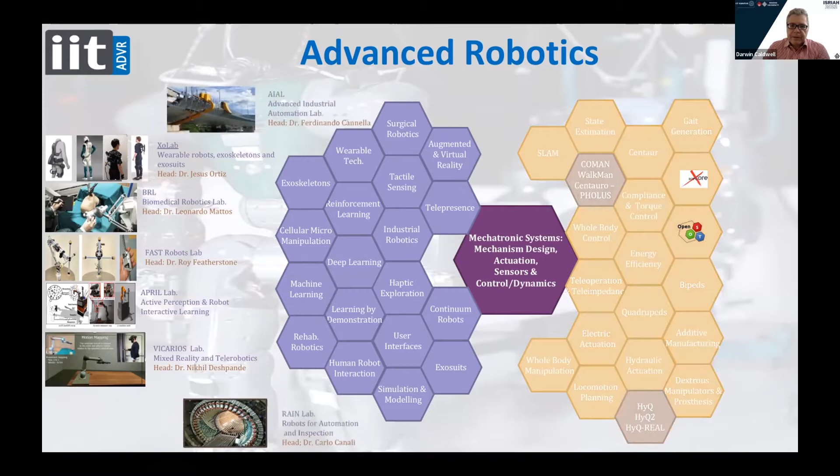To give a bit of history, IIT was created in 2006, after the ICUB, which was built in a project prior to the IIT's setup. The first robot we built was the C-CUB, which was compliant. Traditionally, humanoids and humanoid-type robots have always been very rigid. In fact, all industrial robots are very rigid—they're not designed for interaction with humans.

And so the C-CUB was designed as a compliant robot you could physically and easily interact with. It was designed to have the ability to go between being soft and being very stiff, so you could modulate the stiffness of the actuators in a way reminiscent of humans. We then focused that into a robot called Coman, a very small humanoid about 1.20 meters tall—it doesn't have a head, but it's 1.20 meters tall. This was built in 2012.

Then we developed that into the Walkman robot, with two versions: a 2015 version and a 2018 version. This was a very large robot, 1.80 to 1.90 meters tall. The first version weighed 120 kilos and competed in the DARPA challenge. The second, 2018 version weighed about 90 kilos—same power as the original but a much lighter structure.

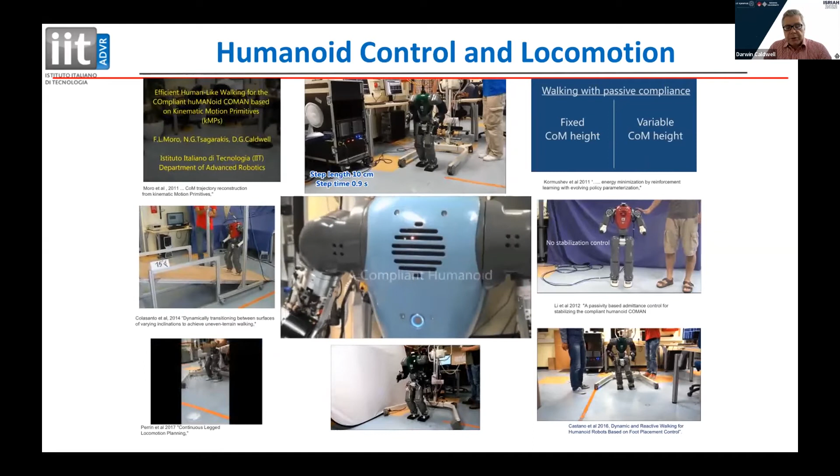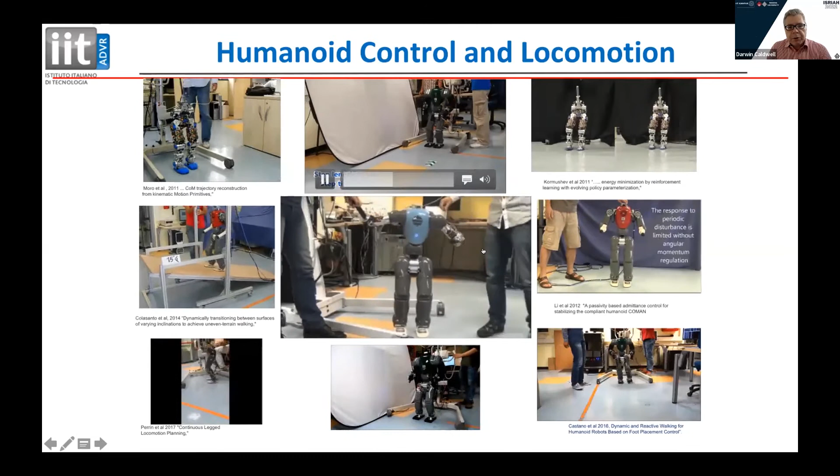This is just to show you a bit of this work, some going back 10, 11, 12 years. Here at top left is the C-CUB, and most of the other robots here are versions of the Coman robot. In the middle you can see how easy it is to physically interact with it—you wouldn't do this with a normal industrial robot—and you can see how the compliance can actually be regulated.

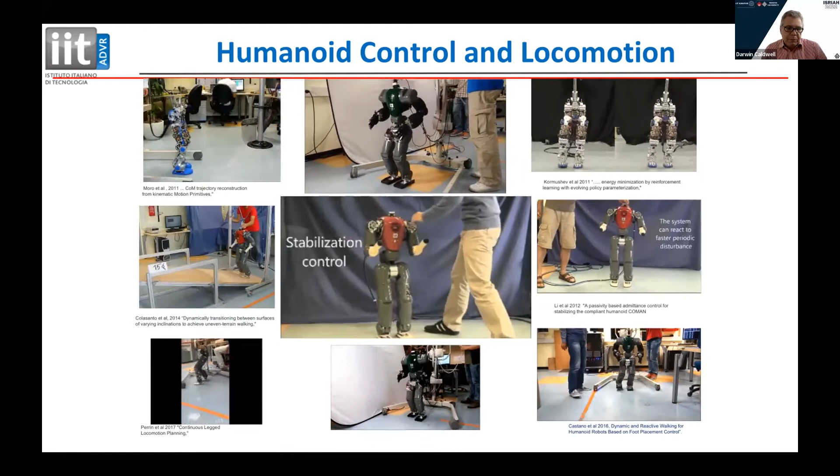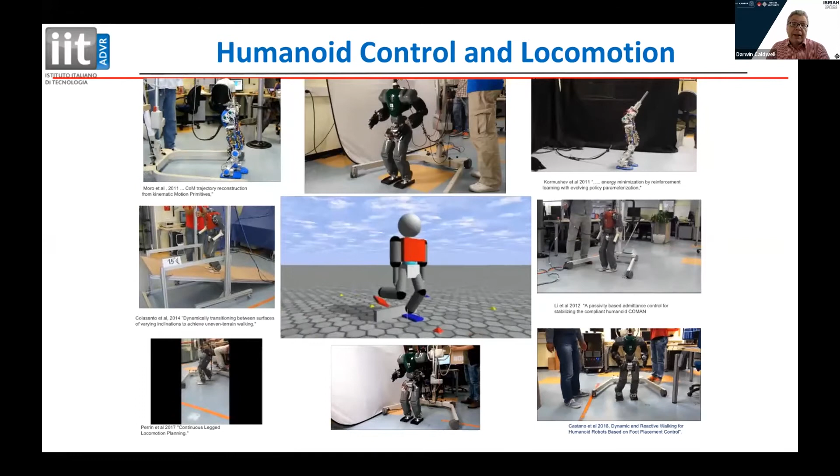We believed at the time this was a very important aspect of robots—maybe 20 years ago, having robots that interacted with people was very unusual, and a humanoid robot that did this was totally beyond expectation. What we wanted to do was develop robots that would be safe and perform better next to humans. These are where the ideas for the Coman series came from.

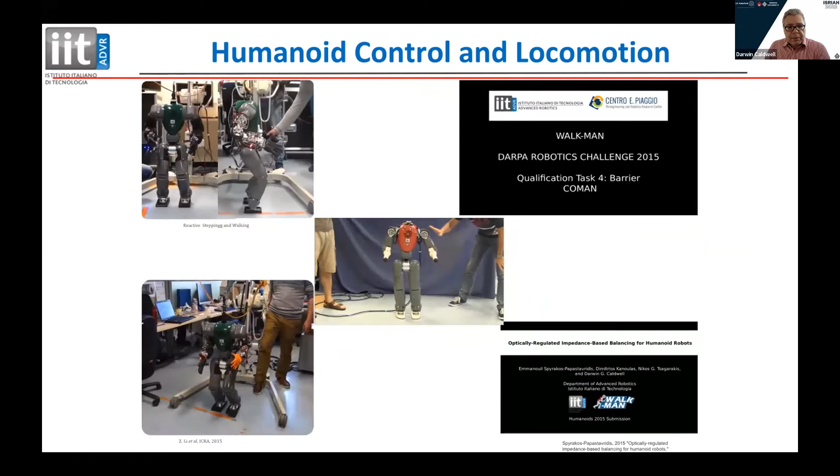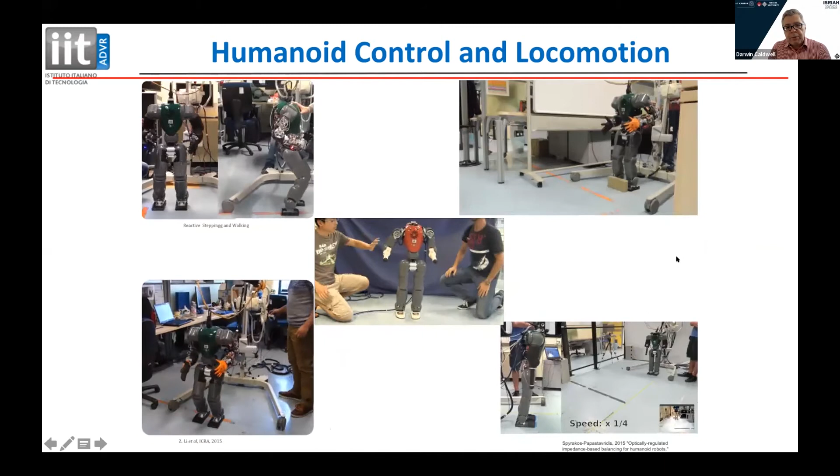Again, some slightly different versions of this—you can see the robot is very tolerant of impacts, you can push it very effectively, and it's able to step over large objects. You can see completely unplanned interactions, and the robot is able to deal with this the same way a human would if someone were pushing them around.

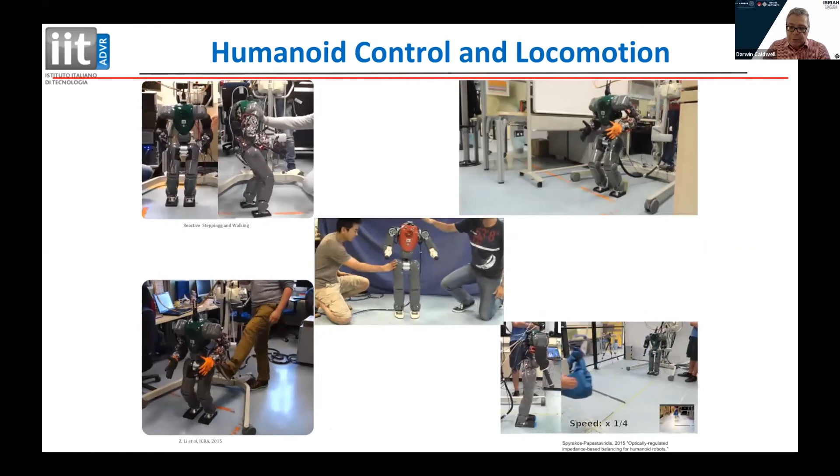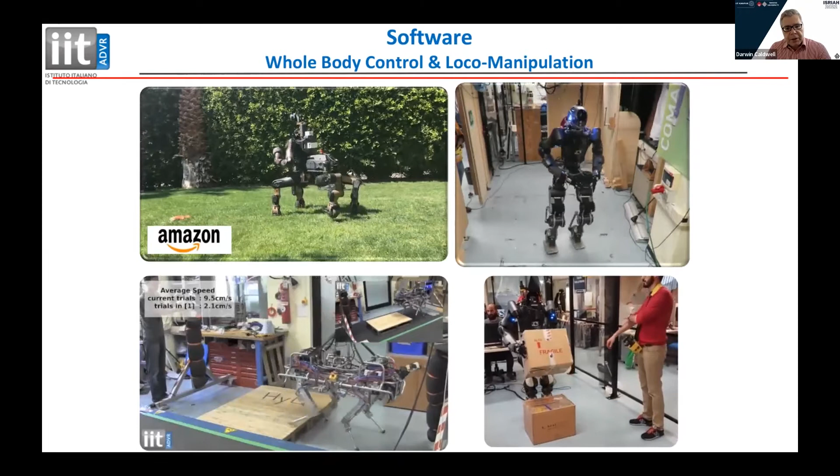Then we had some larger robots. This is the Centaur robot. Both the Centaur and the HyQ were invited to the Mars events. Every year prior to the pandemic, Jeff Bezos used to hold a special event where they'd invite a small selection of robots from around the world. At the first Mars, in 2016-2017, the HyQ was invited. In the last one before the pandemic, 2019, we actually had the Centaur.

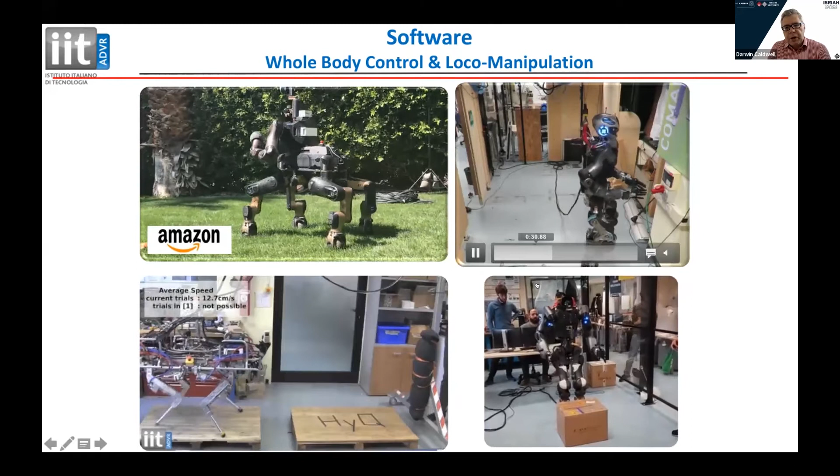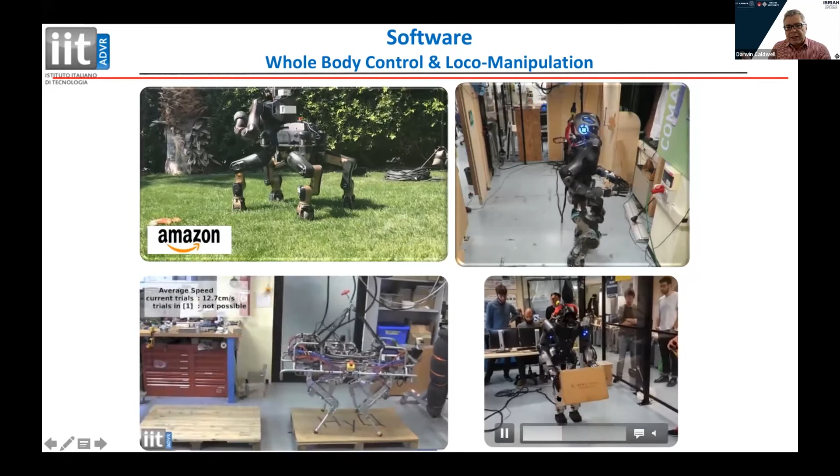So of the 16 robots that have been invited, 2 of those robots have actually come from IIT. Here we can see this is the Walkman, this is Walkman version 2. And this is another robot we developed subsequently, called CogIMon, which is again a slightly tall but slightly lighter robot. We were aiming for a more human-sized and human weight robot.

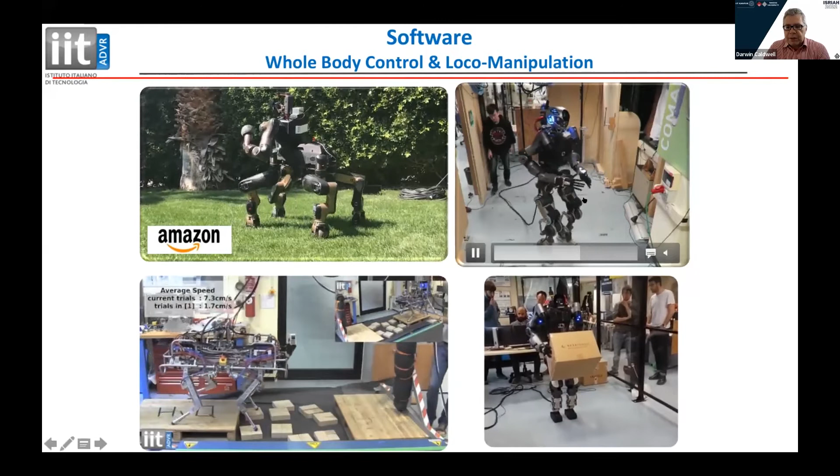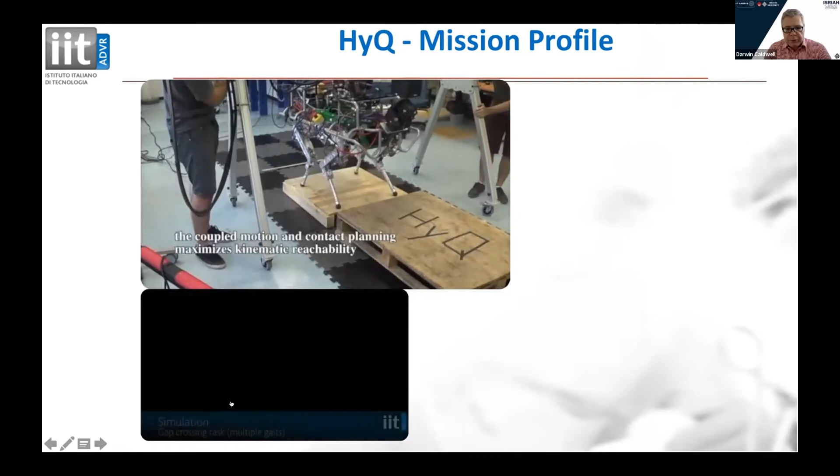The original version of Walkman, as I said, was 120 kilos. Here we can see the HyQ stepping across - I have some better videos in the next slide. We know now many of these things can be done with different types of robots, like Spot and Unitree, but remember some of this work was done 10 years ago. What we can see is a robot very capable of adapting to different environments, being able to climb up over a series of steps or pallets.

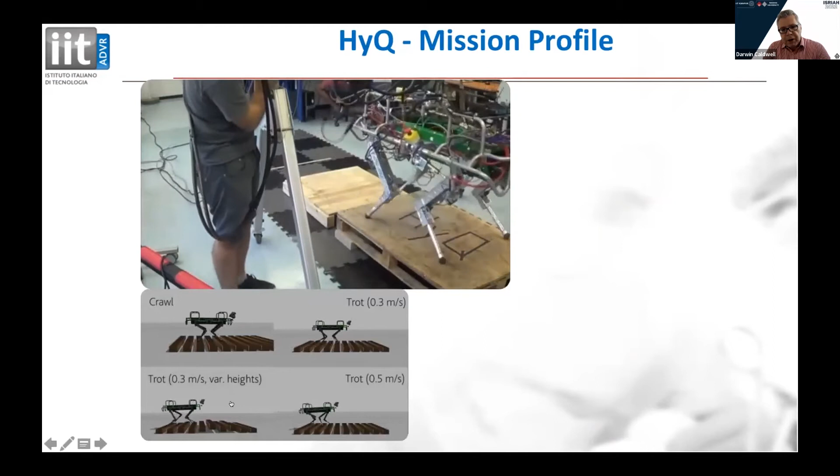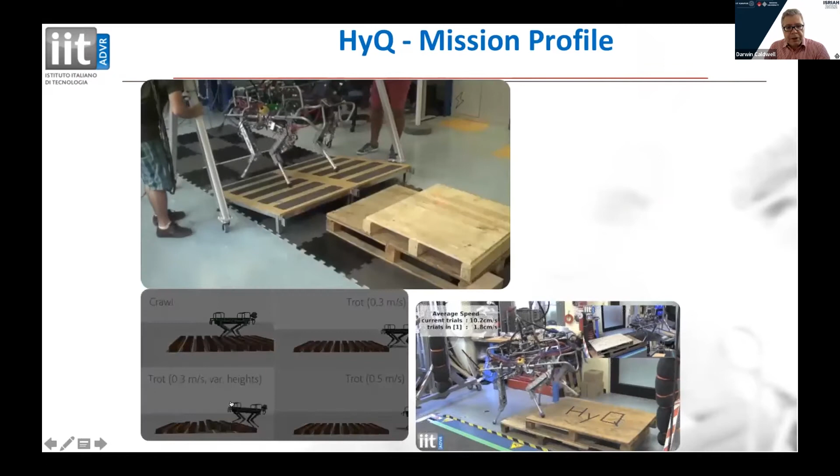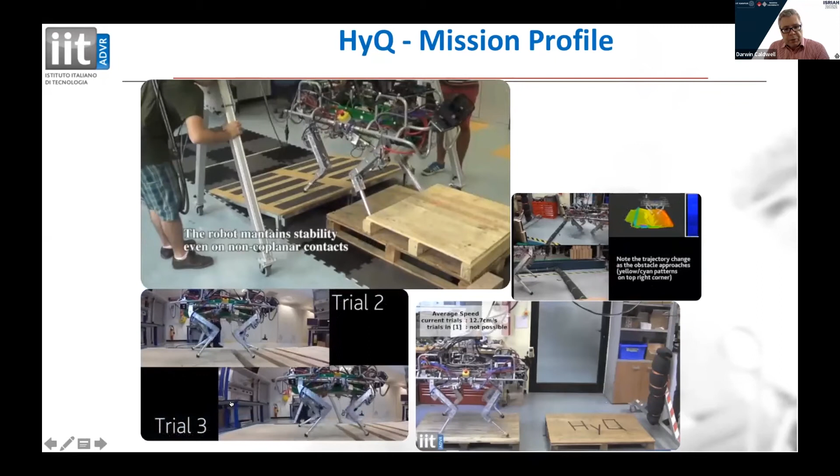Here we can see a number of different surfaces it can climb onto. In the bottom left, you will see it stepping across - this is quite dangerous for a quadruped. If its leg falls into those gaps, it will break the leg. What this robot is doing is able to spot where the gaps are and adjust.

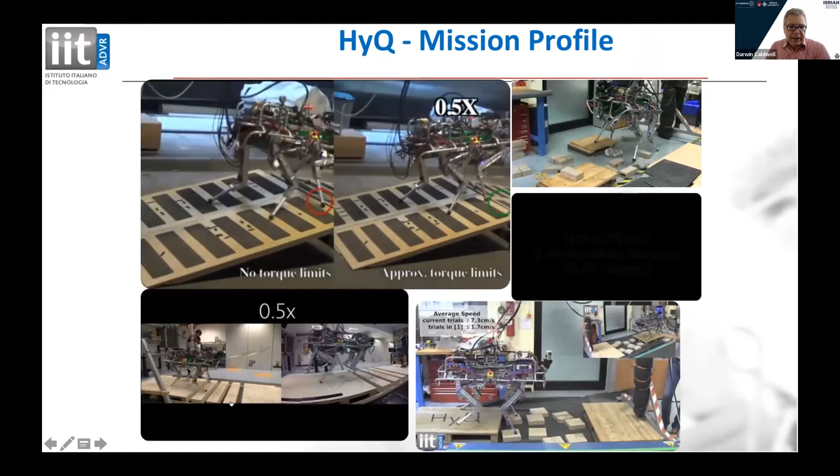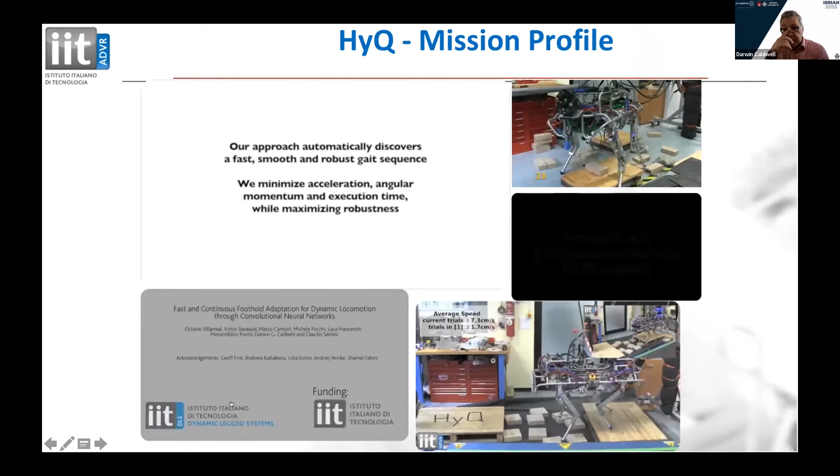In the bottom right, you can see it stepping across quite large step surfaces. Back to the bottom left, what we can see is dynamic adjustment - the person pulls on the reins and deliberately tries to pull the robot across the gap, and it has to step onto the steps and manage not to break a leg. In the bottom right, it's planning very specific leg motions, front and back legs, to where it can put its feet to step across stepping stones, like going across a river, planning those types of motions.

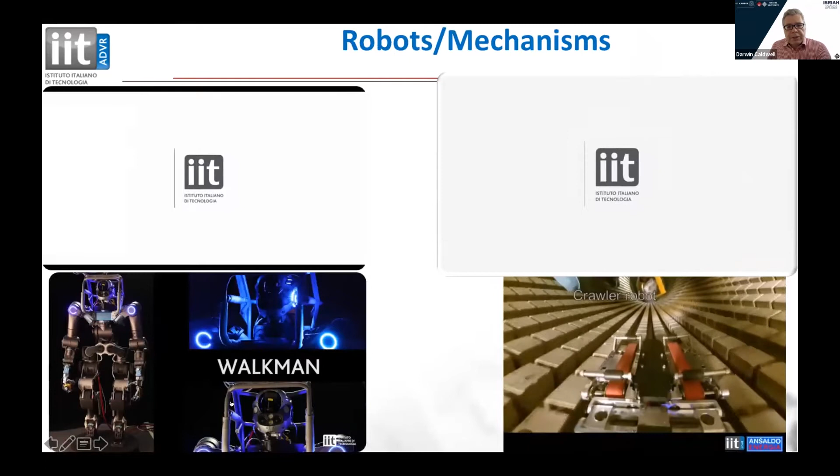This is just showing the top robot - the top robot is the HyQ, this is HyQReal, the most recent one. This is just to show how strong this robot is. Here we can see the robot pulling a plane - this small robot will actually pull a plane. On the bottom, top right, you see the Centauro robot outside.

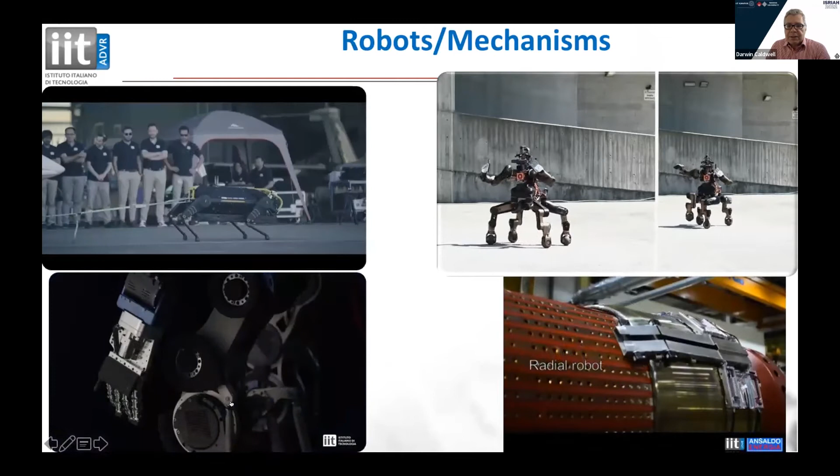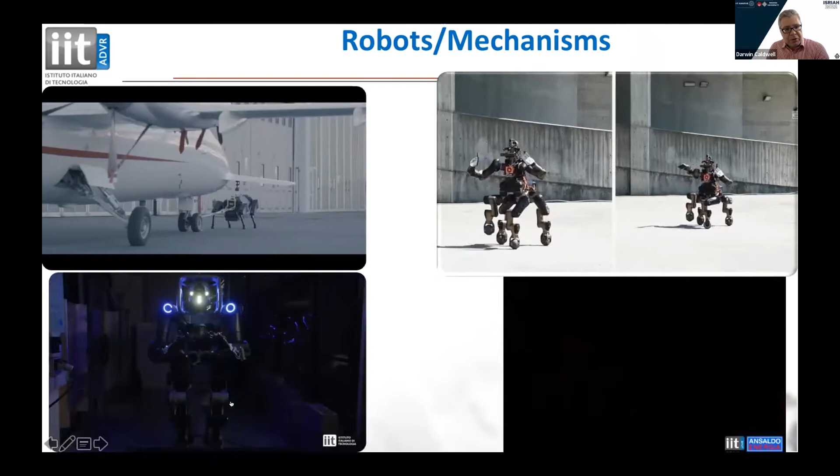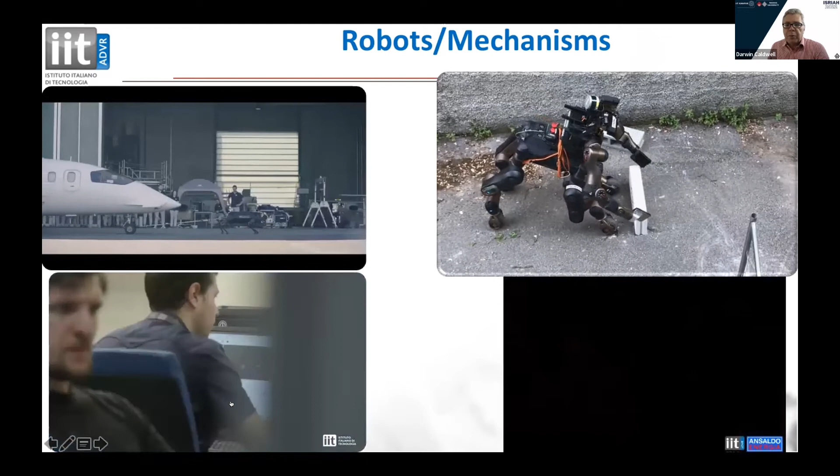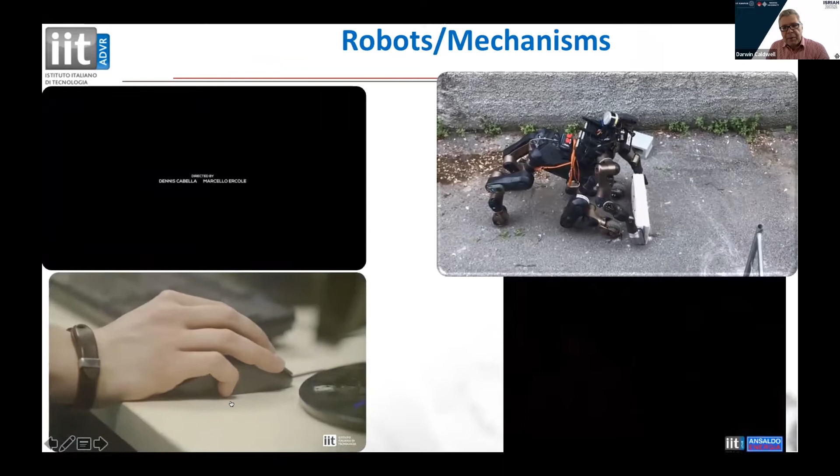It's lifting a brick, I think it's 7-8 kilos. This particular brick, as it turns around, actually shows the weight on the brick, and we can see what sort of size that is. And then you have the Walkman at the bottom.

That was to give you a little background on perhaps some of the robots IIT is best known for, its humanoids and quadrupeds. But for this presentation, I wanted to focus on our work on healthcare, because I think that fits best with the theme of the workshop. What we're working on is our biomedical robotics lab. Within our biomedical lab, what we want to do is develop assistive technologies to augment the performance of the surgeon - we're not about developing robots which do surgery.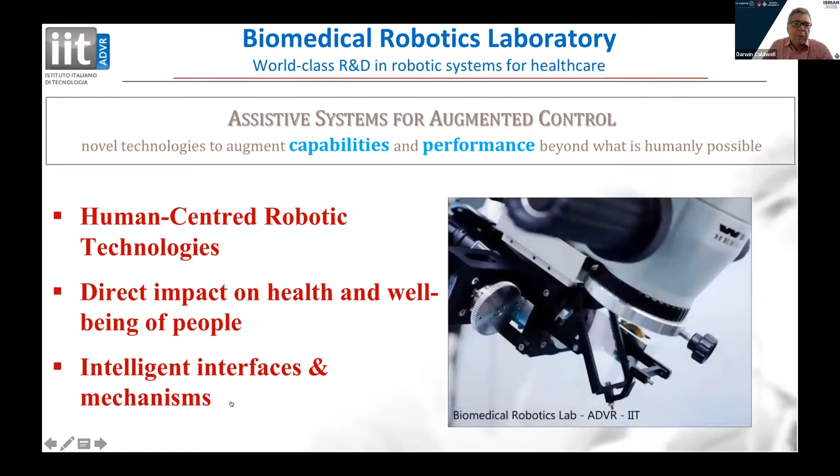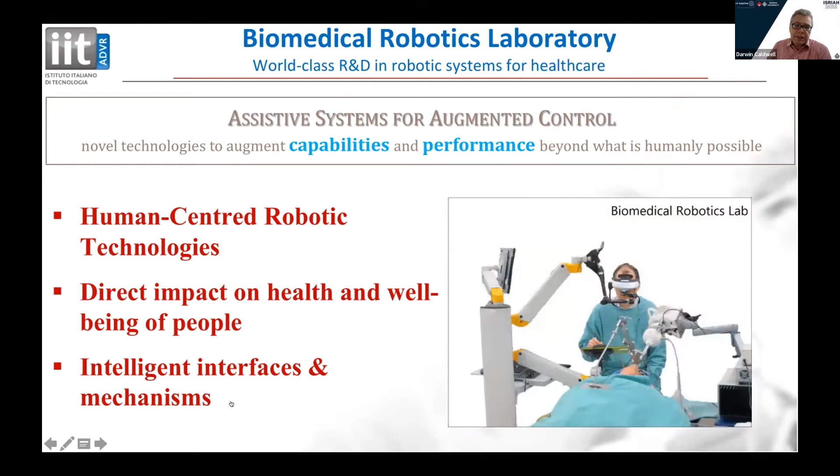What we want to do is develop robots and robot technology which will assist surgeons so they can do a better job. We want human-centric robot technologies, a direct impact on the health and well-being of patients and surgeons, and intelligent interfaces and intelligent mechanisms. One of the first areas we focused on was what we call computer-assisted laser microsurgery.

And this is the laser setup. So what you traditionally have is you would have a surgeon. This isn't actually a surgeon - this is Leonardo De Mattos, who is head of the biomedical robotics lab in my department. He's actually operating this system, but using the very typical setup that you could actually have.

So you would have the surgeon operate through a microscope, a traditional type of microscope. Their left hand would operate a series of forceps, and normally with the right hand, they would guide a small joystick, a very traditional old joystick like those used on a gaming system, to actually control a laser pointer. What we've developed within the biomedical robotics labs is this CALM system.

This is a patented system. We actually have a series of mechanisms to control the actions of the laser. So it's a fully programmable laser system. It's a patented system that we have patented worldwide.

Using the tablet you can see here on the right-hand side, the surgeon now, instead of using this old-fashioned joystick, essentially draws. They use a system which is very like using a coloring system, like a writing or drawing system. Here in the bottom right, the area in red, the surgeon will outline that particular area - he draws around this, highlights it, and now he wants to do a process called ablation.

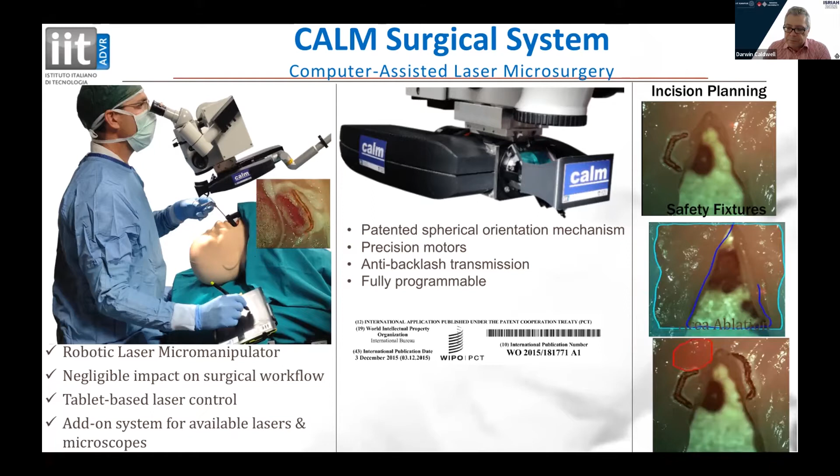This is with an animal larynx, just for the demonstration. We had the traditional tablet that we used, the microscopes, and if you look at some stages, you may even see a small puff of smoke as the tissue is vaporized.

What you can see is this is set up with a cadaver. Here, instead of using the microscopes used before, they're using a stereo screen, and you can see it when you put on one of the lenses of the glasses - it goes from a stereo, a blurred stereo, which you can see with the camera.

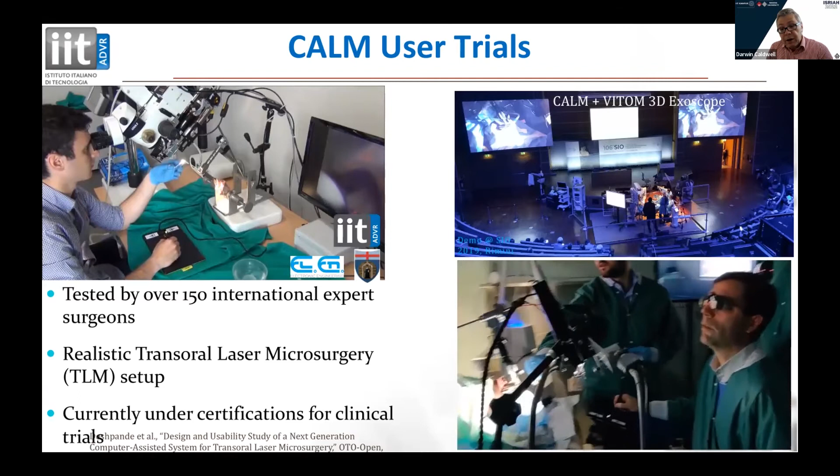But the surgeon - let's go back and do this again - you see the surgeon now is wearing a series of glasses, so he's not looking at the microscope anymore. He looks at the display. All of the other people in the operating theater are able to do the same thing, so everybody's able to see this. These are cadaver experiments, as I've done live. We used the CALM system developed at IIT and a commercial system by Storz, which is the VITOM 3D exoscope.

So this is the concept of what we're wanting to move towards. What we actually have now is the surgeon - this is again a surgeon from a hospital in Milan - and the surgeon's using the tablet, but he also now has replaced the forceps with a haptic device. This is a 6 degree of freedom haptic device where you can manipulate the tissue.

On the right-hand side, you can see a robot being manipulated, the tissue being vaporized. This is done by the surgeon operating the haptic device - controlling the laser with this, controlling the physical manipulation of the robot with the left hand. He has a stereo image which shows the real stereo image, but we can also add augmented reality systems on top of this.

So we can add additional information to help the surgeon, providing information on the temperature. As the laser vaporizes the tissue, it creates an increase in the tissue temperature, and we're able to show this.

So we have a variety of different systems here. We have a head-mounted display, a virtual microscope as we call it. We have 3D imaging. We have the microscope itself, which now uses stereo cameras. We have the laser beam, which is focused onto that, the haptic display, and we close this particular loop so the surgeon is completely in control of all aspects of this.

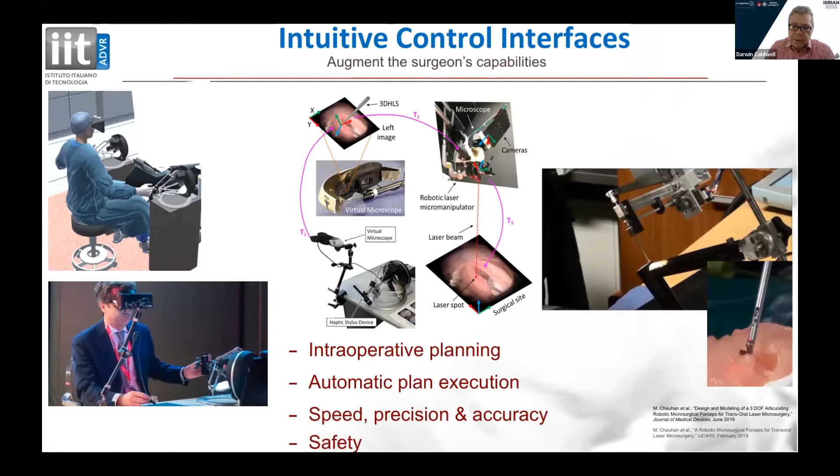And we then move further than this. So about 3 years with this back in 2019. Doesn't feel so long ago, but actually looking back, it's quite a long time.

Back in 2019, we were fortunate enough to do possibly the world's first live demonstration of a 5G telesurgery. This was done between Vodafone Village, Vodafone's telephone network providers, who have a large facility in the center of Milan, in the north of Italy. The surgeon was actually in this site, in a large hall on site in the Vodafone Village. And then we had a cadaver that was actually at San Raffaele Hospital, 15 to 20 kilometers away.

So we were able to do the operations. The type of operation we had here was: we had the tablet mentioned before, the haptic device, the 3D display, webcam. This was all on the user side. 5G communication to the patient side, where we had the CALM system, the computer-assisted laser microsurgery. We had a Franka robot, the Karl Storz VITOM 3D imaging system, and external cameras. Then we sent this image back over the 5G system.

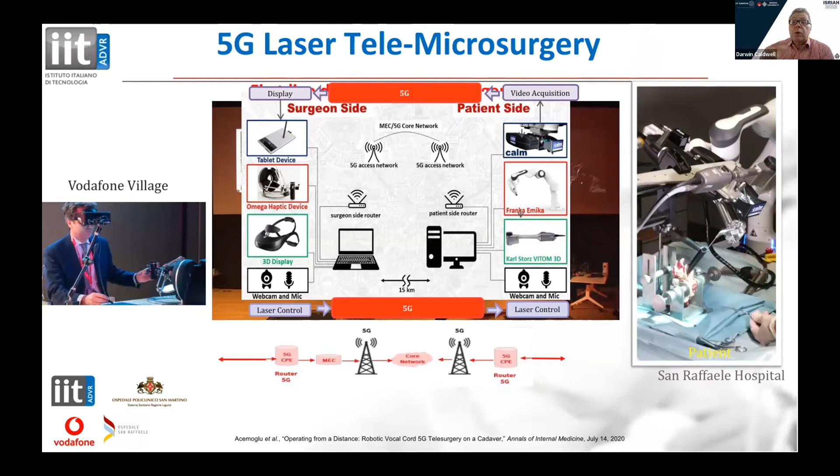Because it's a 5G system, the latency is very, very low, and the image quality is very, very high. We actually did this in a live demonstration in front of an audience of about 200 people. So here again you can see the surgeon - this is Leonardo explaining what actually goes on.

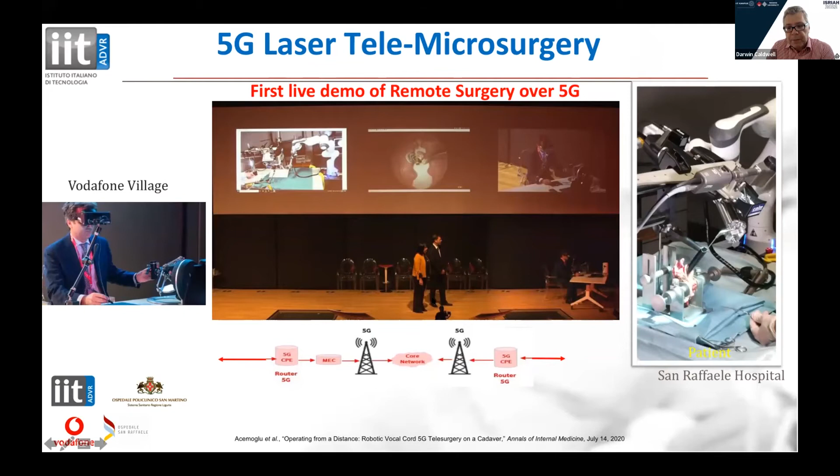In the next one, what we can see here, if you hear a slight buzzing, that's actually the noise of the laser, and you can see the tissue being ablated. This is at the surgeon site. This was in the morning - we were doing this on just some animal tissue.

In the afternoon, we actually did it on a cadaver. I want to show you the cadaver experiments. This is the experiment - this is actually the external view. When you see the internal view, that's on a cadaver. Here you see the surgeon. This is the image you saw at the start, with the tissue on the vocal cords, manipulating the robot, controlling the laser, and then an external display in the room.

The imaging here is just showing you details of the actual latency, which from an engineering perspective you can see is very small - typically under about 80 to 90 milliseconds of latency, which means the surgeons are able to perform the surgery very, very rapidly.

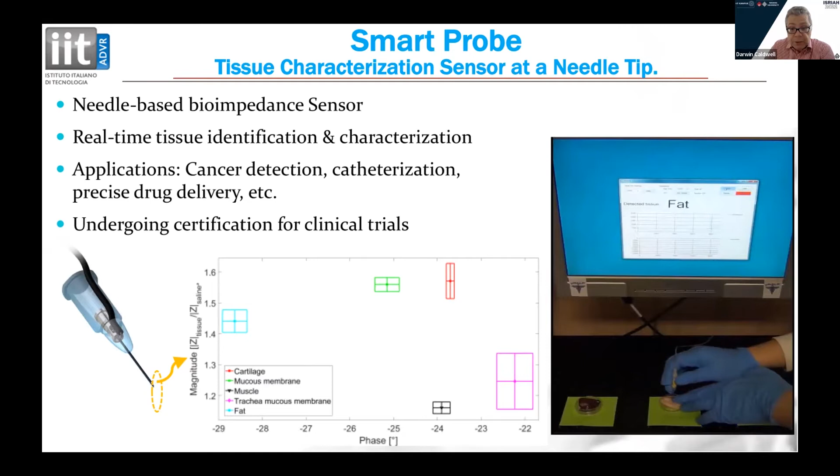So one of the first things we've been doing - if you're a little squeamish, you can look away at this point - is what's known as peripheral intravenous catheterization. This is essentially where you put a line, a needle, into someone's hand. It's a very common procedure - 5 billion of these procedures are performed every year, often with difficult patients. If you have elderly patients, or people with compromised veins, this can be difficult. It's also very difficult to do in newborn babies, where you often try to put a line in with babies that have been born with some sort of condition. So there's 5 billion of these.

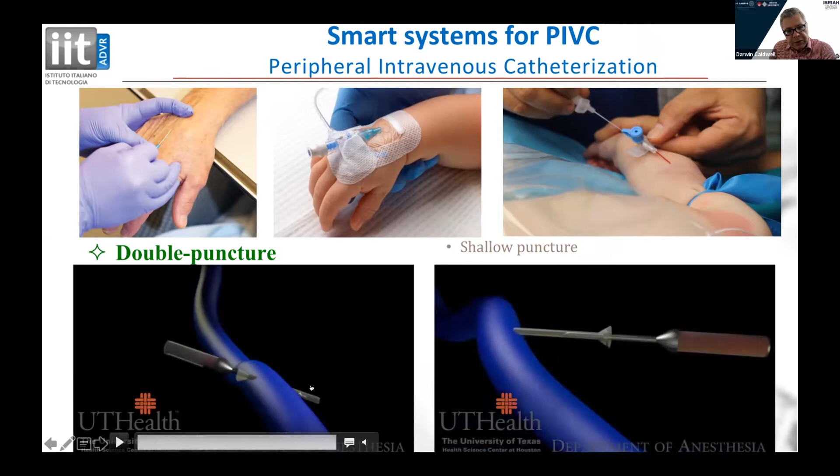Often takes 3 or more attempts to actually do this, which can be very painful and very distressing. There are two common issues. The first is that the needle will go through the vein, out the other side, and the material is actually injected into the tissue around it, and you can see it create very nasty side effects. These side effects are not just painful, sometimes they can actually be life-threatening.

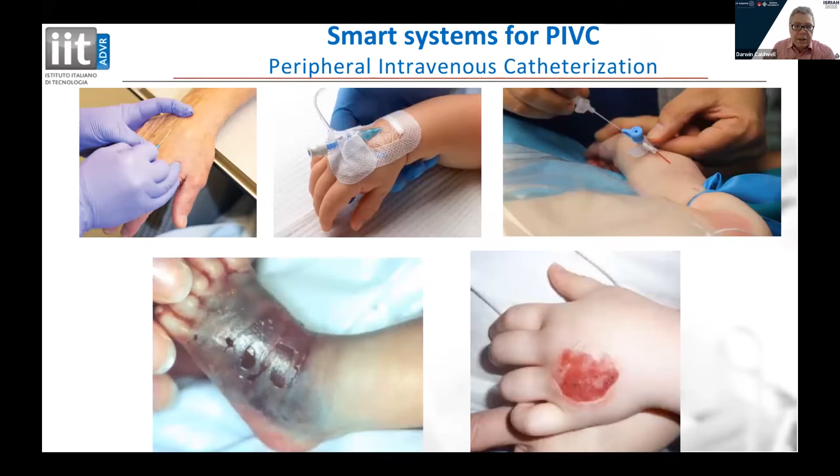And so you can actually see this. What you want to do is ensure that the needle goes into the vein and no further. Using this bioimpedance, what we can actually do is measure the impedance of blood. So the moment the needle goes into the vein, we can tell the person doing the injection that they are in the blood vessel.

And so we've developed a series of different systems. These are the SVEI, the Cathbot. There is another version, Cathbot Pro, but that's a version we're working on with a company, and I can't actually show you that. So what we actually want to do is the needle insertion.

If you watch here, there'll be a green light comes on in a second. Green light comes on - this means it's detected blood. So this was actually done and you can detect the blood. The information you can see down here is the success rate with people who have never tried this system before. So someone who has never done a needle puncture before, using this system, gets an 86% success rate on their first trial. If you remember, I said professionals with years of training often take 3 attempts to do this. You'll realize this system is very effective because with no training, you get nearly 90% success.

But we move beyond that. We now have this Cathbot, and with it, not only does it detect the presence of blood, it physically removes the needle - there's an actual needle retraction. The system beyond that doesn't even need manual insertion. If you look here, it's synthetic, but you'll see a small pulsing of blood, a small red pulsing, showing that blood is actually present in this dummy arm.

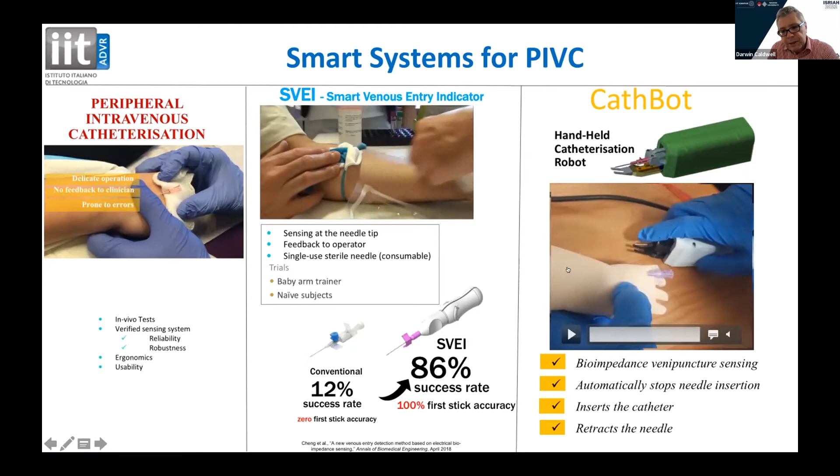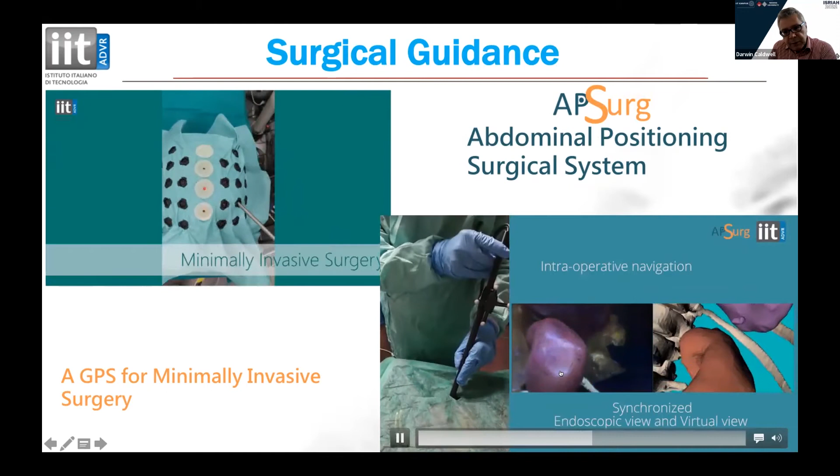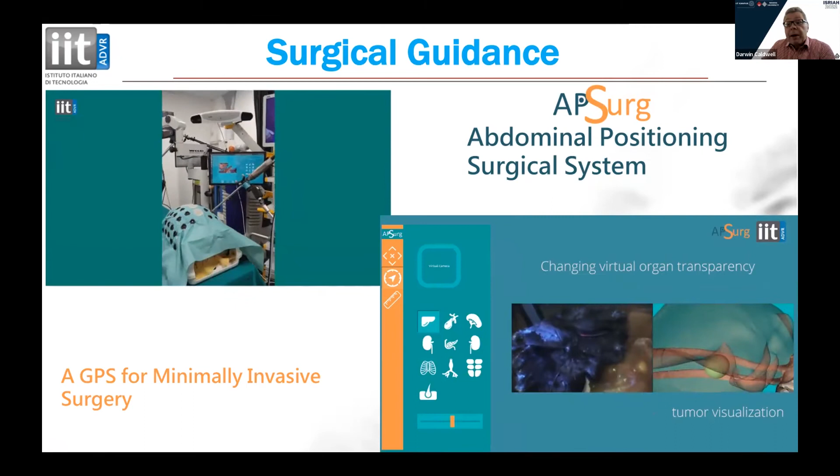Another system we want to use is for surgical guidance. This is essentially a GPS. Whenever the surgeon is actually inside the abdomen, it can be very difficult to tell exactly where they are. So what we've done is create this 3D tracker that's able to tell where the surgeon is inside the abdomen, able to go close to the liver, close to the kidneys, etc., so they know exactly where this is. We can then map that to preoperative imaging, such as CT, MRI, etc. So we can actually add this.

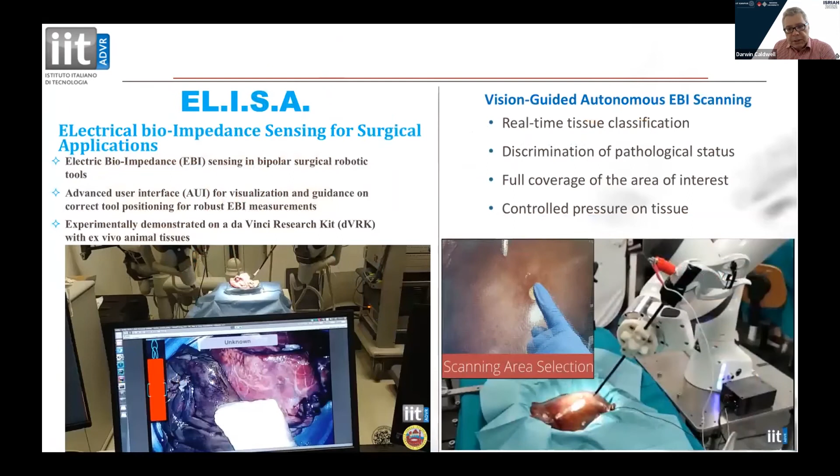But we've gone further with this. In this instance, we've actually linked it together with the Da Vinci system. So we have a Da Vinci Research Kit, and what we're able to do here is use a series of probes, as well as the imaging system, to use the bioimpedance to detect the tissue.

So when it touches the tissue, it will actually come up here, just where it says 'unknown.' It will touch a piece of tissue and tell the surgeon exactly which part of that tissue it's touching. It measures this and tells you it's touching the lung. So it's able to classify the lung as well as everything else.

And we can move further. What we can actually do here is, if there was some sort of inclusion, some sort of tumor present, we are able to move around, and we've already done tests showing that we can detect the presence of different materials within this. We now want to move this forward so we can do real clinical trials to see if it's possible, using this probe to detect the presence of malignant versus healthy tissue, and then subsequently move forward with different types of operations.

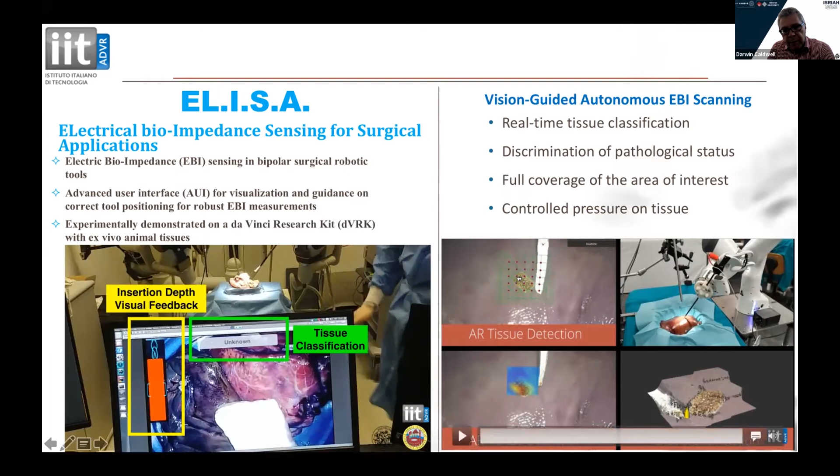It's also valuable to the surgeon because this will define the boundaries of any malignant tissue. So you can say that the tissue here is healthy, the tissue here is malignant. What you want to do is find out exactly where the edges are, because you want to remove all of the bad tissue and nothing else - you don't want to remove any good tissue.

So now I'll move forward. We do many different types of surgery, but to observe the time, I want to move forward. Each of these slides shows four different types of surgical procedure.

In the top system, when we do laser surgery, we use a laser that essentially vaporizes the tissue. When it vaporizes the tissue, everything becomes very hot. You can essentially cook the tissue, which is a very bad thing to be doing. So what you want to do is remove the tissue with the minimum amount of scarring.

So we developed an AI-based system to work out the temperature, and we can feed this back to the surgeon in the head-mounted display. If you look here, you'll see a color probe showing the surgeon the temperature of the tissue, and we can either display the temperature or physically stop.

In the bottom, we can use these same lasers to remove tattoos. Quite often people get tattoos, and many years later decide it was a really bad thing to do. So we have lasers that we can use to automatically remove the tattoos.

In the top right, we wanted to take the current system, which uses a free beam laser, open in the air, and develop it into an endoscopic laser so we can do operations in the abdomen or inside the body and be able to twist and turn.

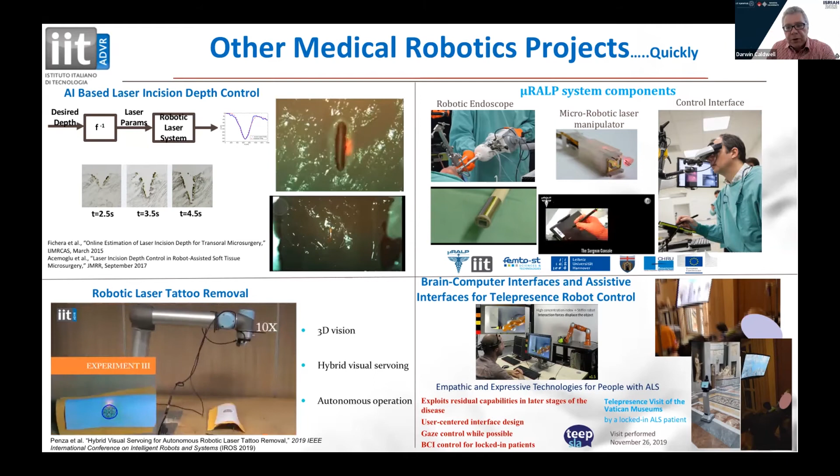Various different types. As I mentioned with the endoscopic laser, I wanted to put it into a fiber. When you put it into a fiber, it's very difficult to control the laser. But we've put magnetic coupling in here, and we're able to physically move this laser inside a fiber optic.

With these lasers, it's very important to be able to focus, because you don't have the normal focusing mechanism. So we developed a specialized focusing mechanism based on hydrogels that was able to do this.

This imaging is taken from the throat, and what you can see here is a tumor. We want to identify this, but sometimes it's difficult to tell - this is clearly tissue which has been compromised, and this is healthy tissue, but the boundaries are very difficult to determine.

So what we've done is what we call endoscopic tissue analysis. By imaging this under a variety of different imaging systems and different frequencies of lighting, we can tell the difference between the healthy tissue and the malignant tissue.

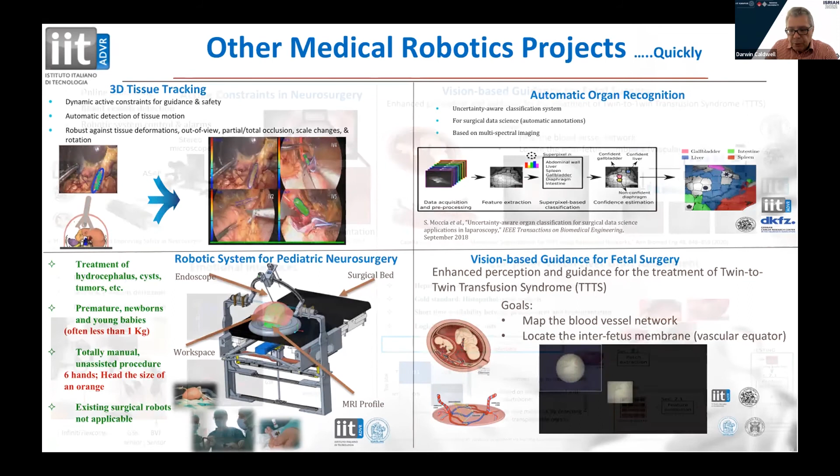So we do some work on this. We do work on active constraints, and we do vision-based fetal surgery, which is again an extension of what I showed before.

Our emotional interfaces are for ALS. As well as measuring people's brain signals, we can also measure their emotions—we measure their heart, their blood supply, their sweat, etc.

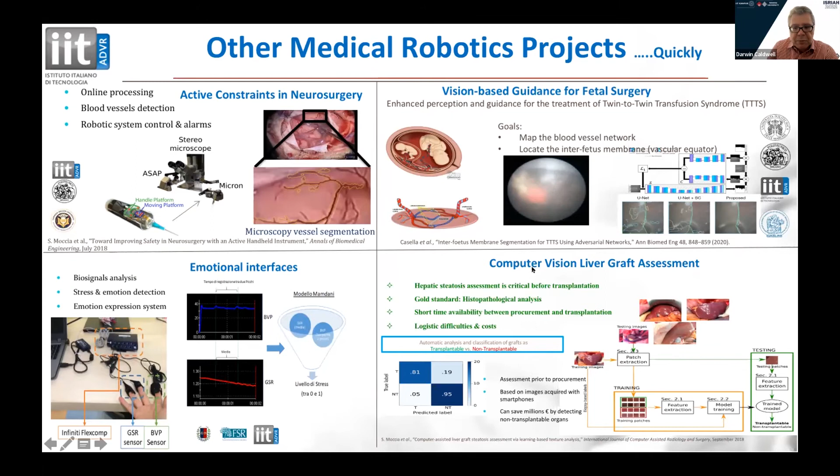We can do computer vision liver grafting assessment. Sorry, I'm going very quickly at this moment because I'm aware of the time. In fact, I have a couple more slides—do you want me to finish now, since I'm a little over time?

Yep, about 4 minutes, Professor.

Okay, I'll go through the next bit very quickly to show you some work we're doing on musculoskeletal disorders. These are the types of things that happen in a working environment—construction, even farming environments. You're lifting and moving things around, and you can end up with a lot of damage to your back. These are very common injuries. In fact, the most common reason for loss of work is from musculoskeletal disorders—damage to the nerves, muscles, tendons, and ligaments—representing nearly two-thirds of all reasons people are off work.

Just in the UK, a relatively small country, over 500,000 workers are affected every year. The bottom figure is perhaps more indicative: in the EU, they reckon on over 250 billion euros of estimated cost from loss due to musculoskeletal disorders—2% of GDP.

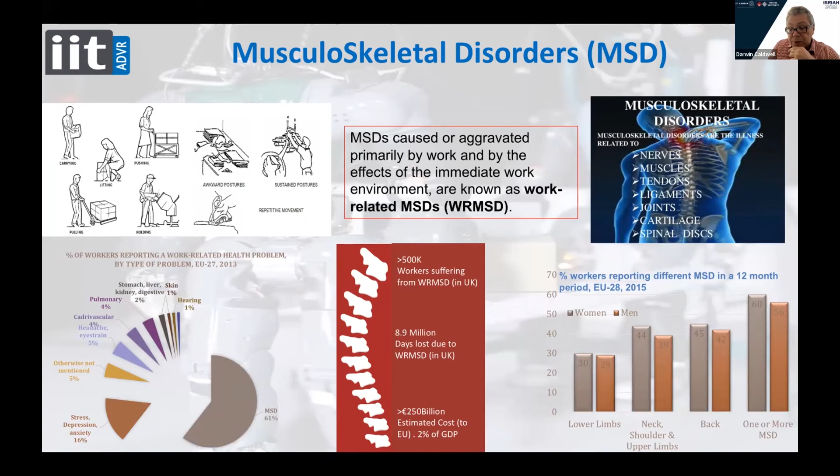There are many different approaches. One suggestion has been building exoskeletons, but you need to be careful with them, because while they potentially help, they also have certain difficulties. You have to be careful about discomfort on the skin, increased stress from working the exoskeleton on top of your normal job, and collision risk since the exoskeleton is bigger than you'd normally wear. It's heavier too, so there's an increased cardiovascular load, etc.

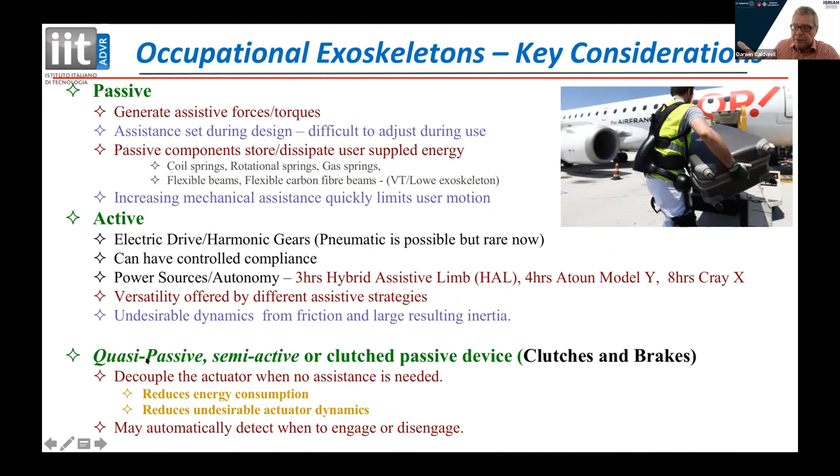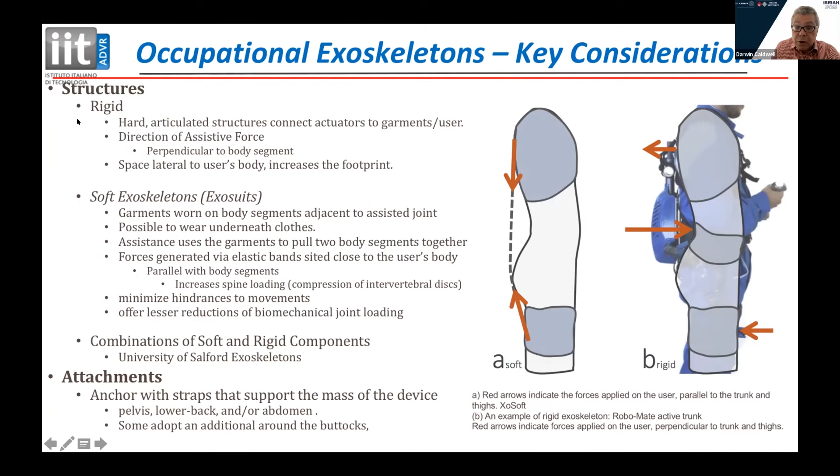But what we've actually been doing is developing a series of different exoskeletons—they can be passive, with just springs, or active, or a mixture. We focus on active and quasi-passive exoskeletons, which have a mixture—not fully active but not passive either. The structures can be rigid or soft, like a piece of clothing. The ideal scenario is probably to be like clothing, since this is easiest, without wearing external structures, but at the moment rigid structures are most common. We do actually work on soft exosuits too.

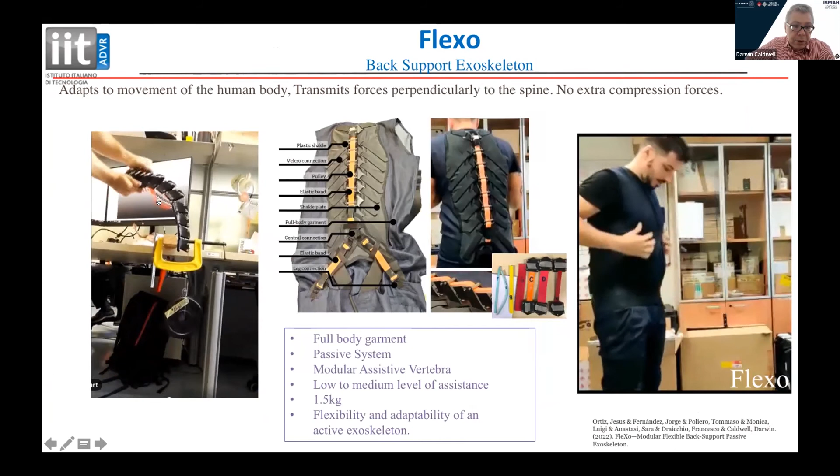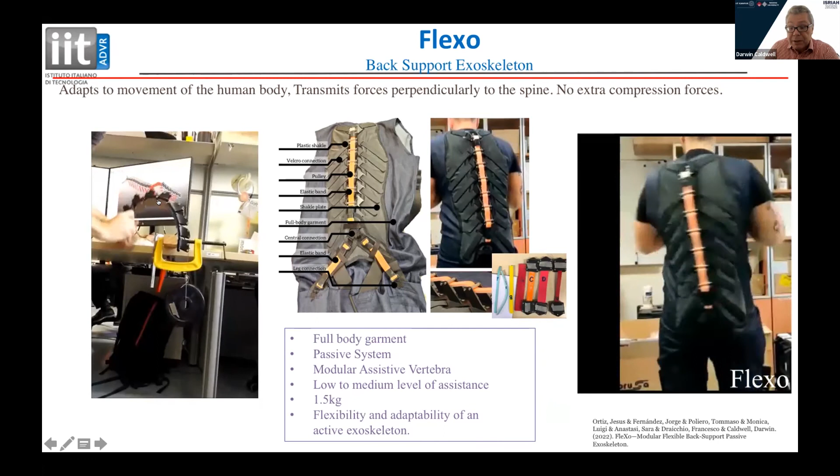Here we can see a relatively simple system—this is passive. The person puts this on, and it provides a lot of support for their back using an exoskeleton. It's very flexible, as you can see on the left-hand side. It supports a weight—in this instance a relatively small weight of about 5 kilos—but we can change the actual loading and the levels of assistance, either passively or quasi-passively. You can see it's a very flexible system that provides great support for the back.

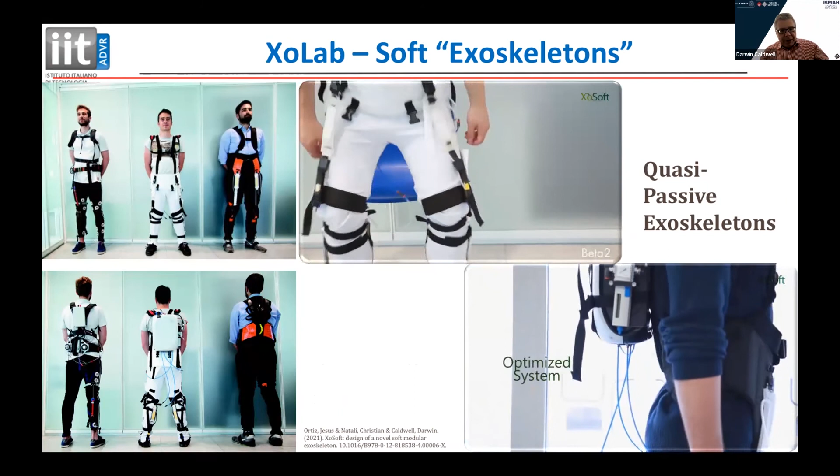We do these types of things. This is a quasi-passive system, and what we've actually done is put very soft actuators onto the joints. So when the person sits down and stretches the joints, they put elastic energy in there. Then when they need to sit up, that energy is fed back to the person. So during the sitting motion, you store energy and then release it, helping people stand up and do a variety of different actions.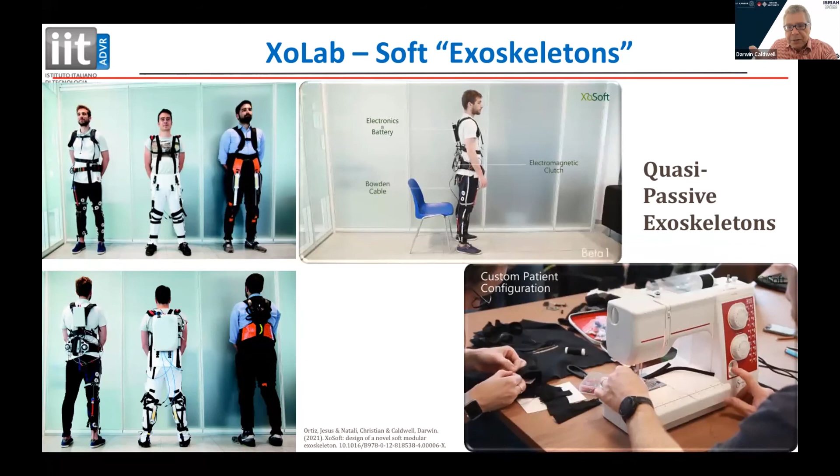You can see it's easily built into textiles. It's not the most pretty at this moment in time, but it can be potentially very effective in the long term. We have here some work for space, because astronauts actually lose a lot of muscle mass. So this is a suggestion of a textile system that could be used by astronauts.

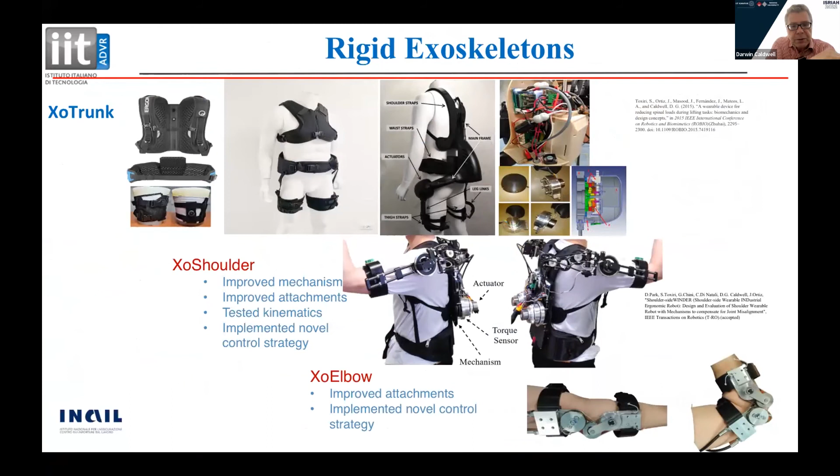Here we have a variety of different exoskeletons. These are the rigid exoskeletons for the trunk, for the bottom of the back, for the shoulder, for the elbow. Here we can actually see some examples. This is used in a factory where they handle food. This is in the deconstruction of cars. This is a system that actually works onto the shoulders.

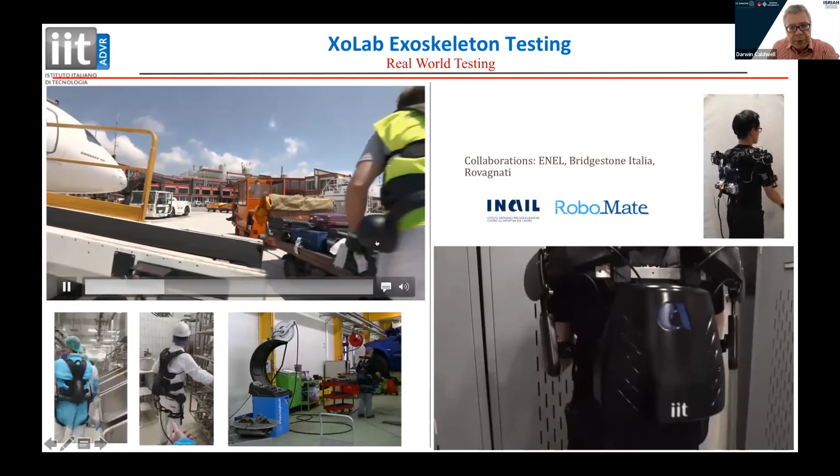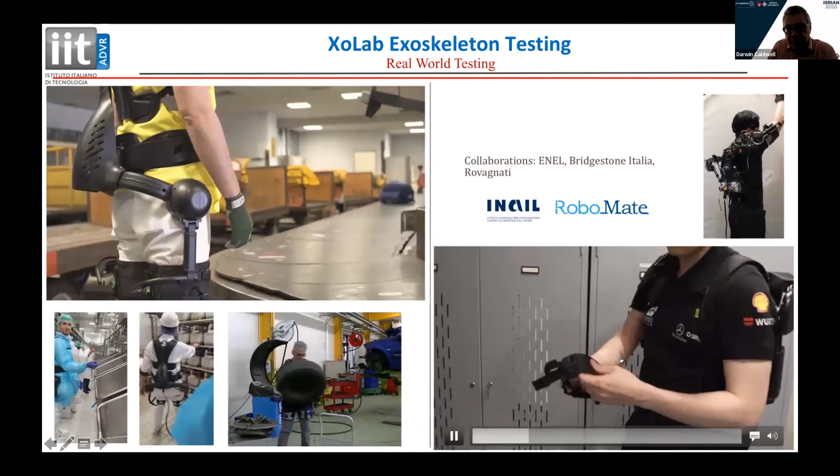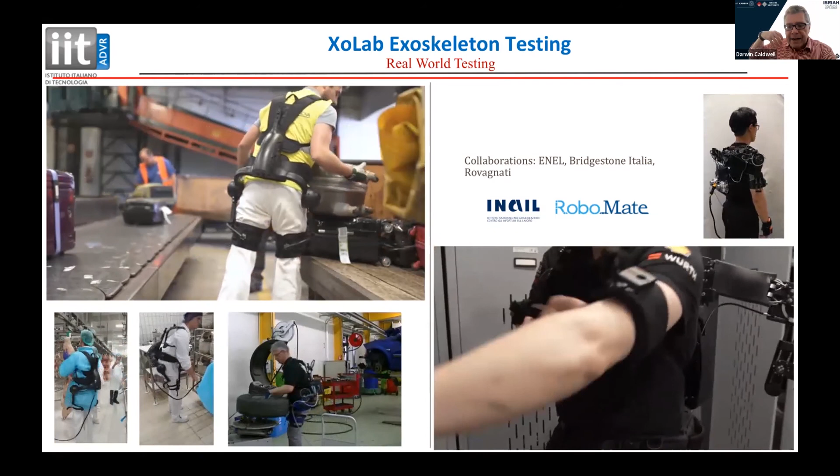This was at the local airport being used to assist people lifting heavy loads, suitcases typically 20, 25, 30 kilograms. Here you can see this particular system for the shoulder. This was done in a local garage where the person was able to go out and do car maintenance, working above their heads without any restrictions to their shoulders, offloading much of the loading you'd have had working above your head.

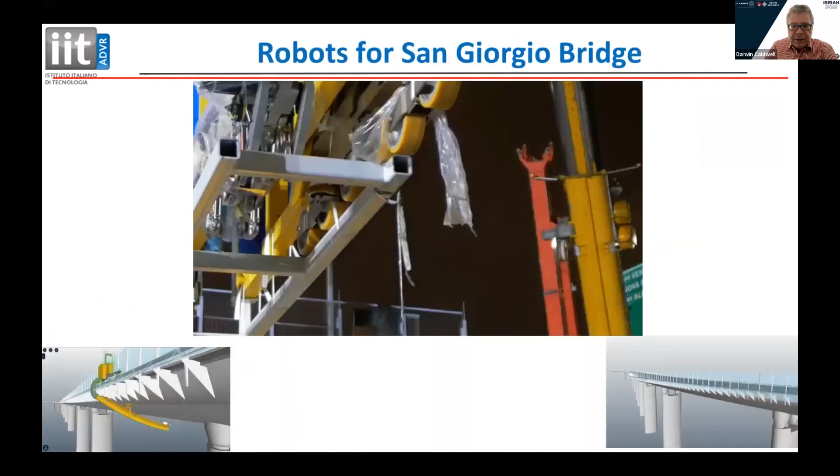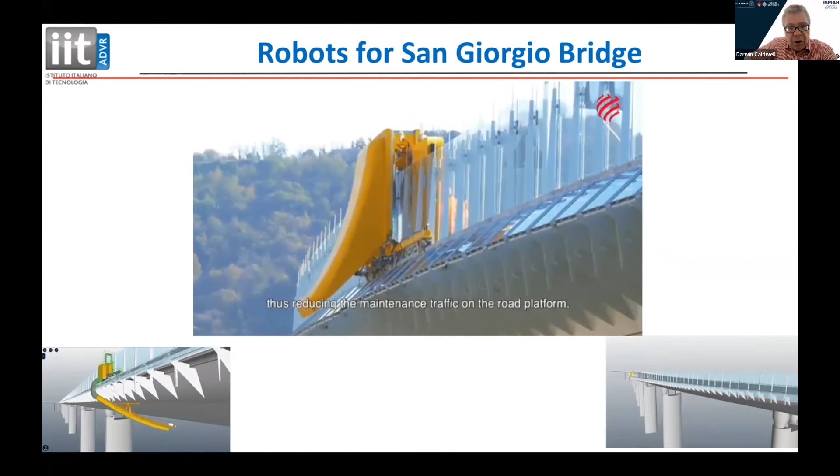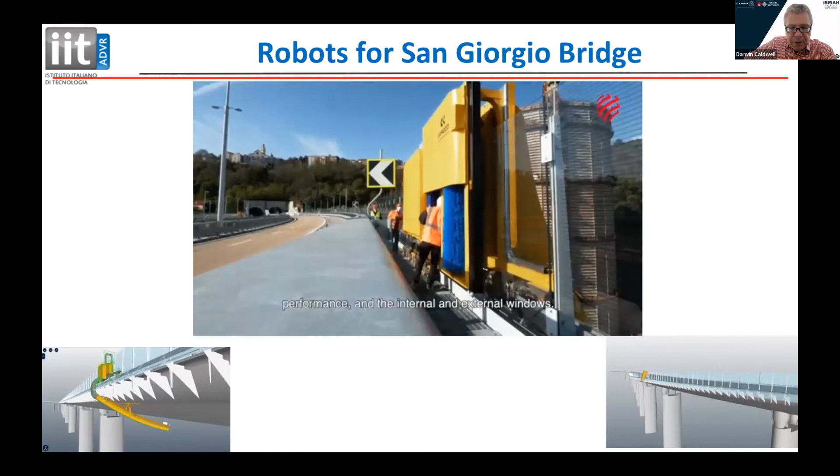Here you can see, the bottom shows simulations of an inspection system underneath. The video at the top shows a cleaning system for the solar panels along the side - these are robotic solar panels. They're able to do the inspection. This is the under-bridge inspection, with a series of cameras built into this system.

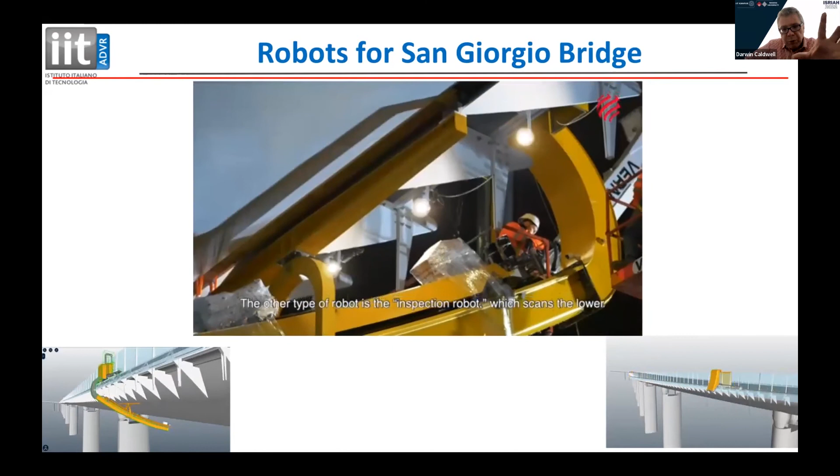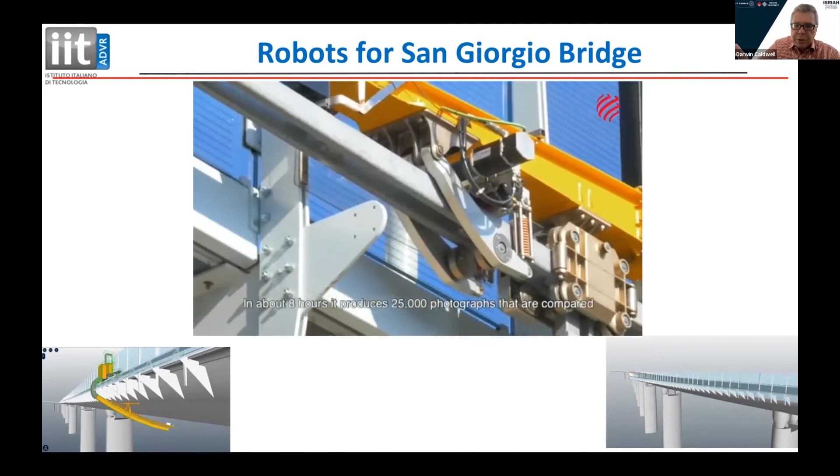It will move backwards and forwards. The bridge is, I think, about 1 kilometer long. So it goes backwards and forwards during the course of the year, doing an inspection, building up plans, being able to work out that the bridge stays in good condition.

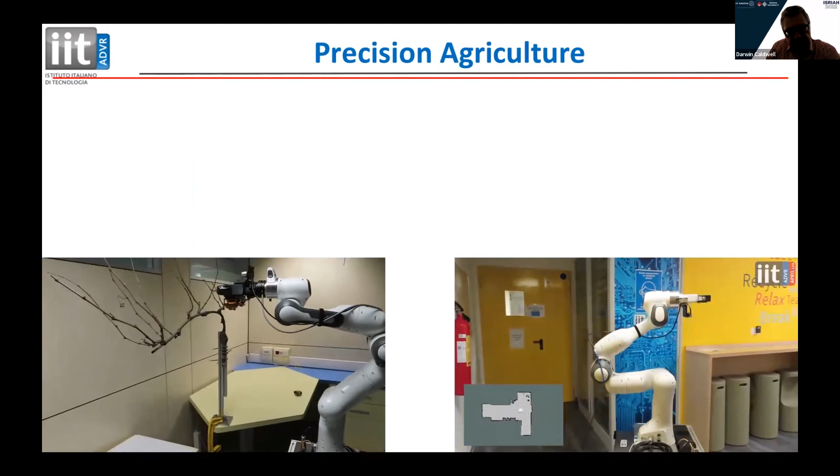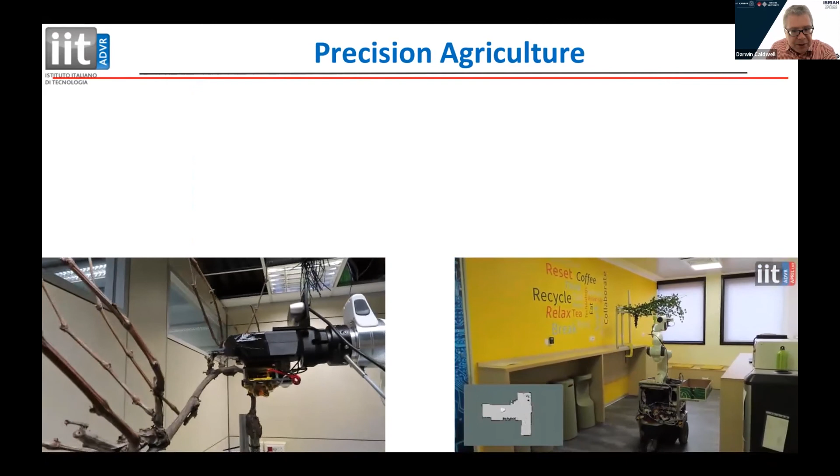This is some agricultural work, I haven't got much of the details. This is what we call winter vine pruning. This just uses a mobile robot, but we put it onto one of our quadrupeds. It goes out into the fields and prunes these vines, using a vision system to identify them. We did some tests on this just about 3 weeks ago, because it's the end of the winter vine pruning season - there's only certain times of the year you can do this. So we do the lab tests and then move on to real tests.